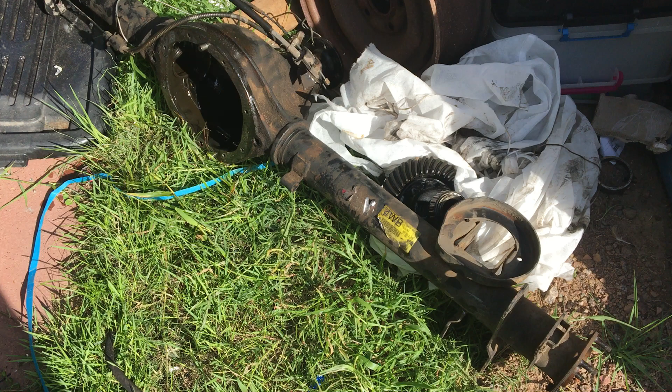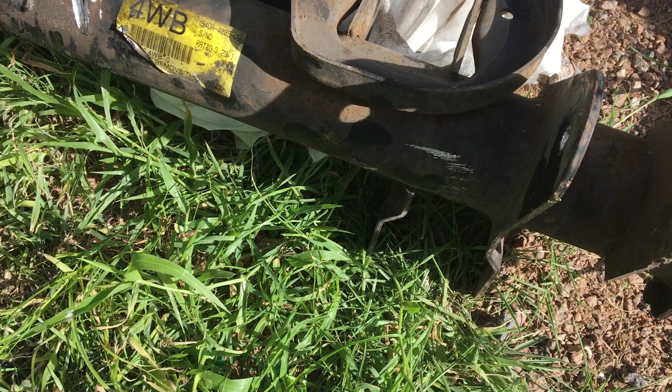Alright, today was just a practice day on a spare diff. My intention was actually to take these brackets off, but after about an hour of having a go with the recips and all that, it's just too hard. This hard metal, man, just too hard. I had to go at a couple of brackets here.

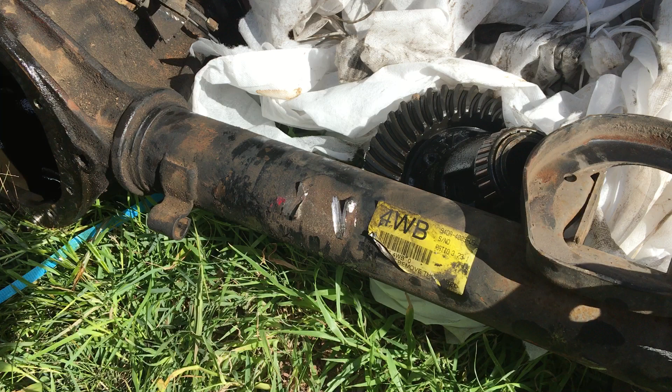As I said, this is a spare diff, and that's not something you'd normally do, because you end up stuffing the brackets trying to get them off. I had a bit of a go down here, and it does work, but it's just an incredible amount of effort. So that's probably not a good idea.

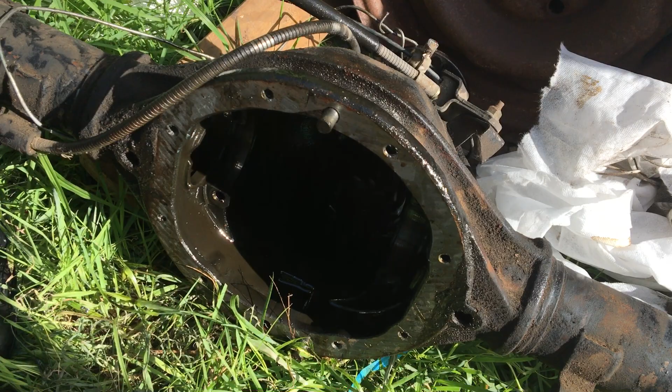I thought it was a good idea, but anyway, that's why we do these things. So I stripped the diff on this just to have a go at it, to make sure I understood what I was doing and how it was going to work. I'm still going to get that off yet, because I need a real big, powerful battery drill to do that. I just can't undo it because it won't lock in.

So anyway, it'll come out pretty easy. Brakes, discs, everything comes off real easy. Undoing things is very easy, actually way easier than I thought.

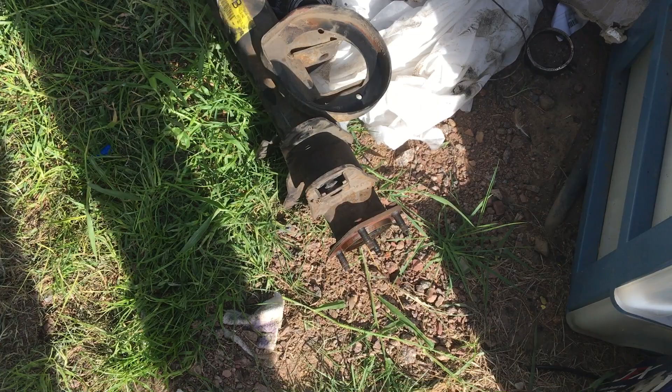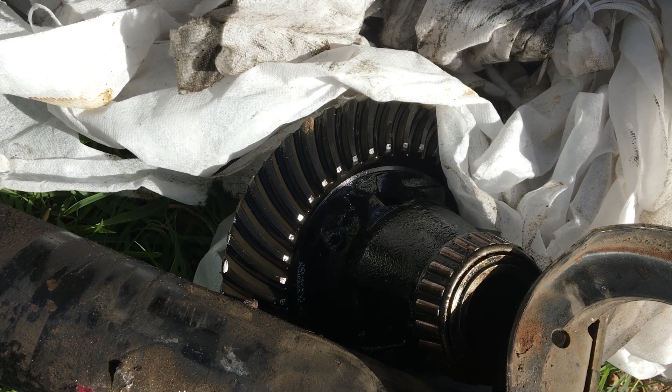I'm not messing around with the center, of course, so I'll be pulling that center out of the Wagon's diff, which is the one with the limited slip and 2.77 ratio. I'll be pulling that out as well, so I'll be making them all pair and matched and make sure that's all the same. So that'll be a job I'm looking forward to now. I was a bit worried, freaking out, but it's easy, yeah.

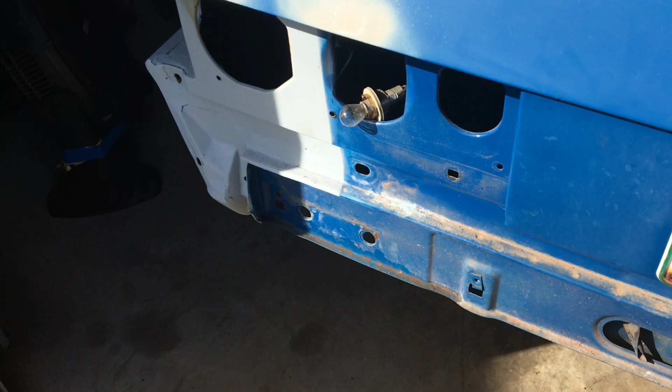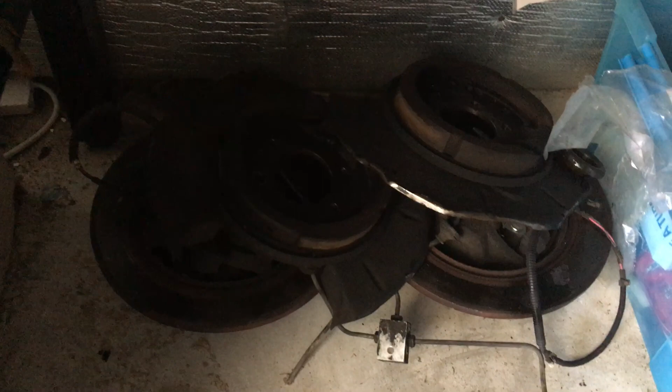So that's okay, that'll be coming out next weekend, depending on Christmas. I'll be pulling the wagon diff out first, then pulling that diff out, stripping them both down, and putting a limited slip and the disc setup onto that one, and doing a bit of a swaperoo. I've kept all the spare stuff from that other diff anyway, just in case I need it, and I'll see what condition the brakes and calipers and all that are in, so I can make sure I get the right gear. So yeah, that's where we're at.

It was about an hour to strip it down, so it's really very easy - it kind of surprised me, to be honest. So yeah, that's all I've done, not a lot. It's just been so hot, just been goddamn dreadful, to be honest.

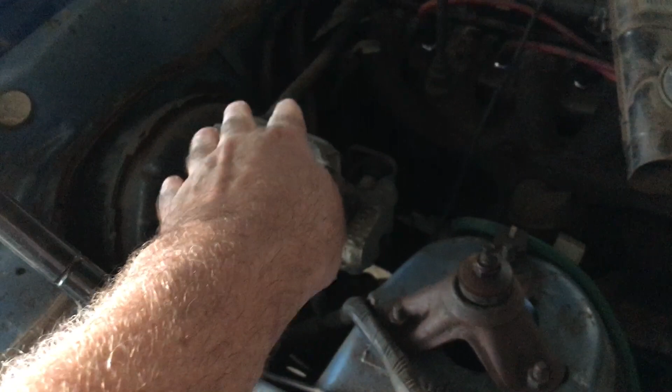I've also realised this is a later model - not later model, but the 84 Model XE had a different setup. The others are square with just a clip-on lid. This is a plonk-on lid, but this one's got the clips and all that, and apparently on the 84 model it's different. So it's basically the XF, I believe. This is like an August 84. They only made the XEs for another month after this was made.

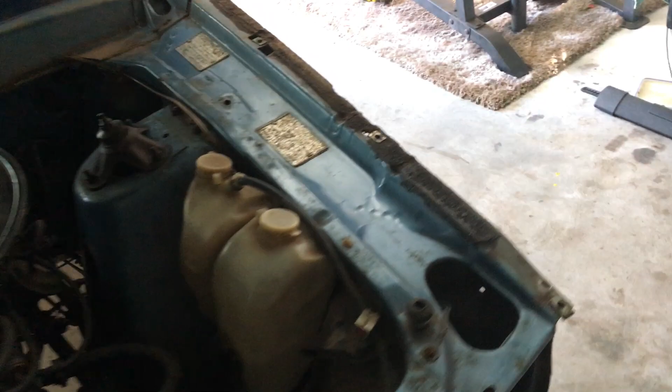So that's okay, yeah, really not much going on. It's just been really bad weather. I've been pumping the aircon, but the missus and the kids needed aircon in the house, so we can only run 3 aircons at once, and that's pumping about 80 amps, I think.

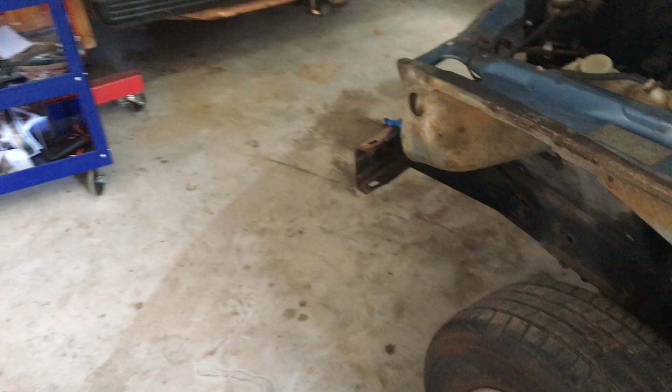So we get to the limit of our switchboard when you've got 2 of the big 11.5 kilowatt single phase units going, one here, one in the lounge, and the other one in the daughter's room, plus the dryer going on a Sunday. Yeah, my meter - you could hear it, and if it had a whirly one and not electronic, you could actually feel the pain.

So anyway, I set up trophies and did a little bit of a shed thing - the old racing trophies, boxing trophies, drag racing, circuit racing, all the bits and pieces. The kids insisted I do that, plus it was a bit of fun.

Did a little bit of work on the shed, some of the old signage stuff I've got in the past - bit of Ford, bit of Holden, bit of HSV, and these are all the missus's. Old pictures we used to have in the house, but we've renovated our house now.

So these are actual puzzles, a bit hard to tell, but yeah. The missus did these when she used to have time - she doesn't have time anymore unfortunately, but she did these amazing puzzles, and we put them in frames, and they're utterly terrific. What a great way to do the puzzles. Absolutely terrific, so that's where it is.

Anyway, it's all good. So also did up a job list. Now often people wonder how you go about a car project - this is about 8 pages, believe it or not. It's quite incredible how much work there is to do on a car.

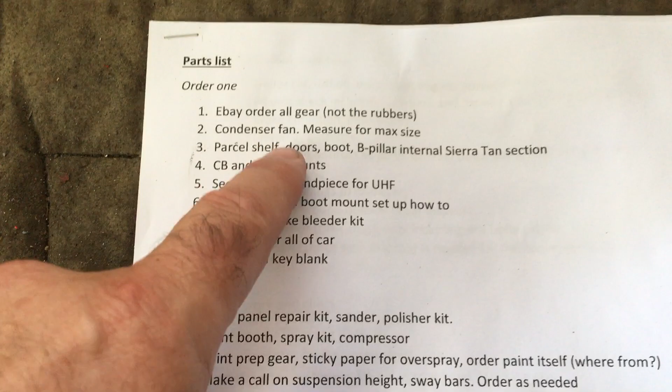I'll smash this thing hopefully by, I'm aiming for the end of March, but parts and all that, maybe time might be a bit of a fight, but I'll get there. So anyway, the eBay and what you need to order, where we need to order it, get the old COP, CB and UHFs back in.

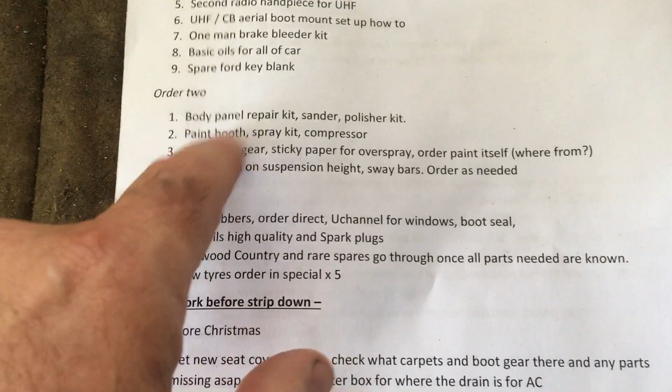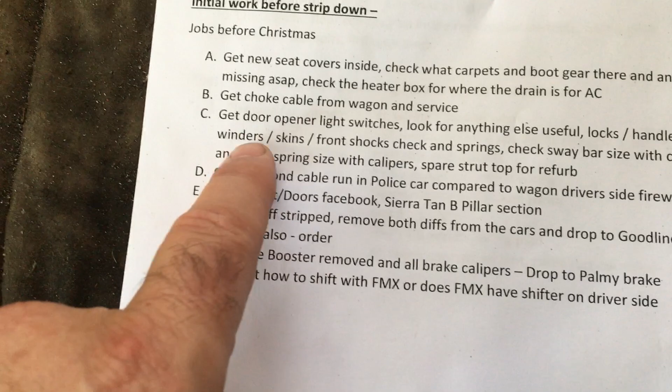All the body gear that I need to order - paint, door rubbers, all the oils when we actually put the engine back in. You've got all the jobs to do beforehand, before Christmas. So I've just got to compare things and diffs and brake booster removed and all that, which I'll do next weekend.

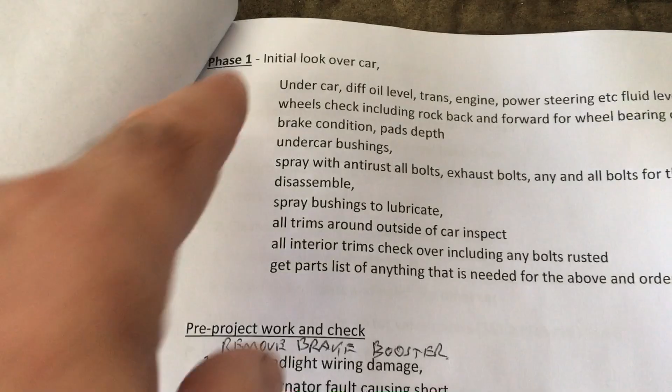And this is what I've mostly done already - this is the initial look over, phase 1, see? Parts, first page, and phases. So you just put it into phases, work out what you're going to do and make sure you cross it off as you do it.

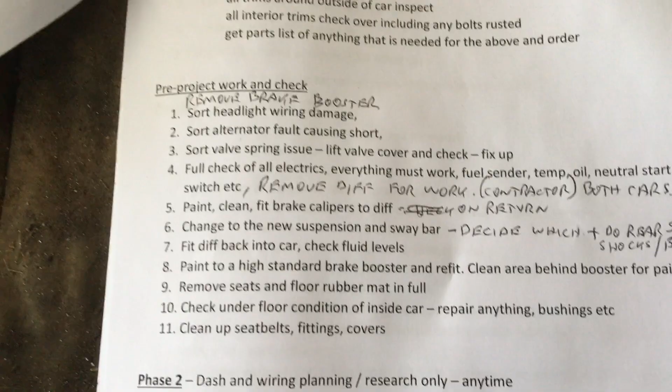So yeah, you just work through bit by bit. If people want, I can send them a copy of this if they're really interested, but it's going to be different on every car, but at least this is something.

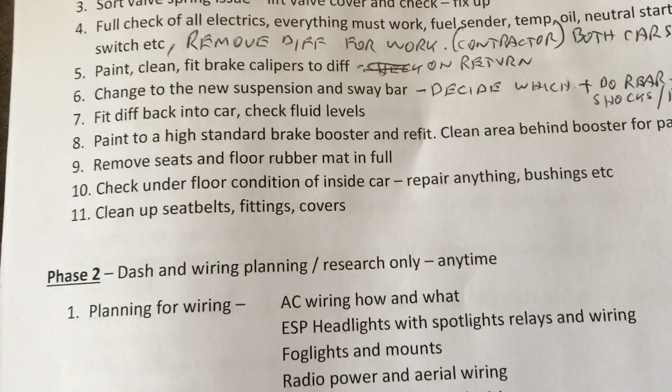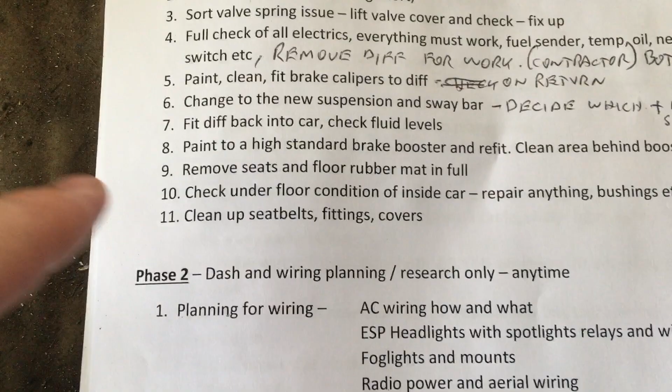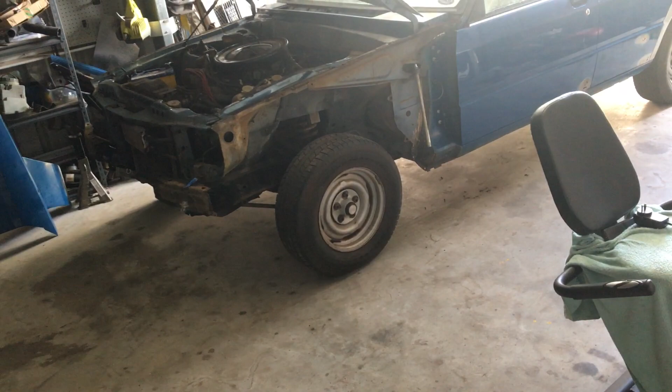So all these - alternator's done, valve springs are done, electrics are done, calipers I've checked them, so the suspension and all that I've got to work out what I'm going to do with that - whether to keep it really high up in the air like it is, or drop it down. I'm a bit on the fence, but that's just a suspension change, that's nothing. For now I'm going to leave it up there, and then we'll reassess after a bit of time and see how it handles and drives.

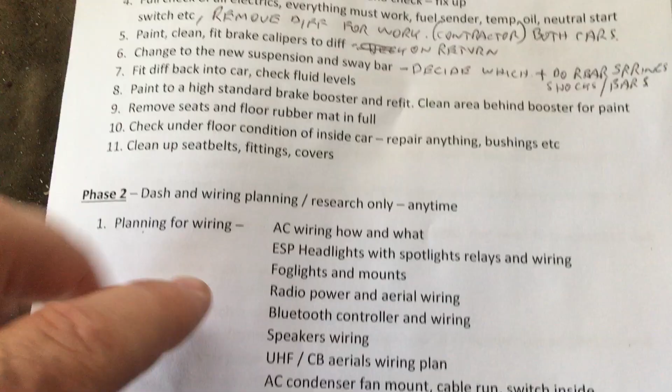So it's not a race car, it's not a sports car, it's just a cruiser. Carrying on, then we're into phase 2, that's where we start doing the internals, all that sort of stuff - planning, wiring, all the prep.

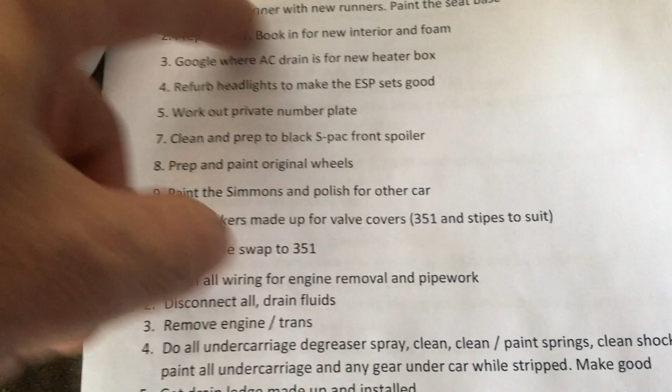Phase 3, this is just fill-in jobs. So if you don't want to do anything, you've got fill-in jobs of anything and everything you can do if you need. If you've got an hour spare, you can pick one of these and go and do it.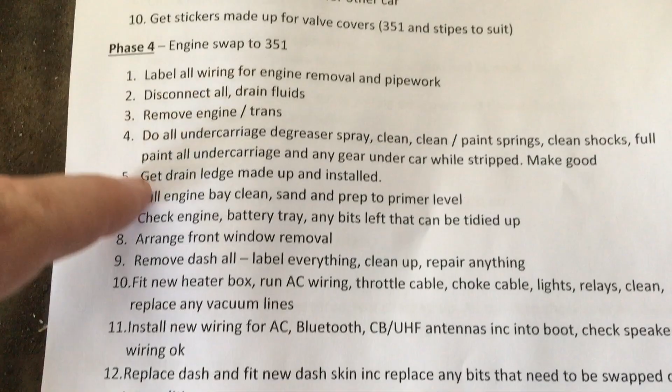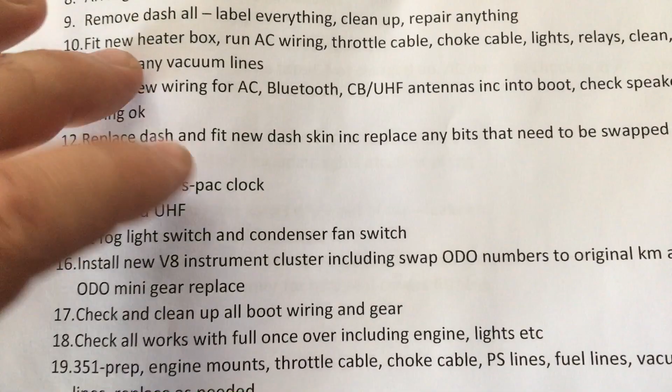Then we're into the engine swap phase, so that's where we pull the old engine out and put the 351 in to make sure she's all done. That's quite significant, and it also includes the interior stuff as well - that's to get all the engine, the dash, everything all up and going.

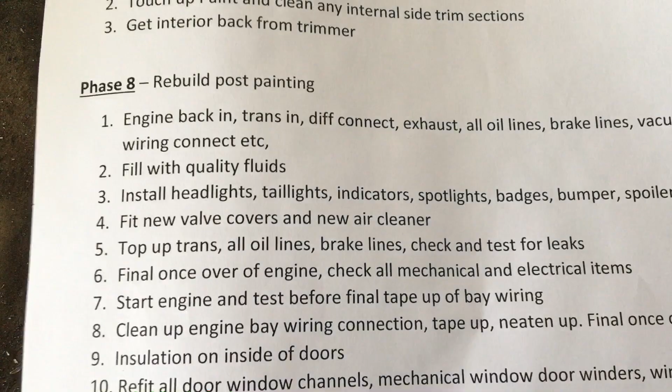So all the wiring, final checks. Post install, you've got all this stuff, then you've got all the prep for paint, which means you've got to take the engine out again, of course. Then obviously paint the car, and then interior cleanup, and then post rebuild after painting.

That's all the stuff you've got to do after the painting. Unfortunately I'm running out of time, and then of course you've got to update insurance, take the AC to be topped up, and go over the pits for rego. And that's that. Righto, thank you.